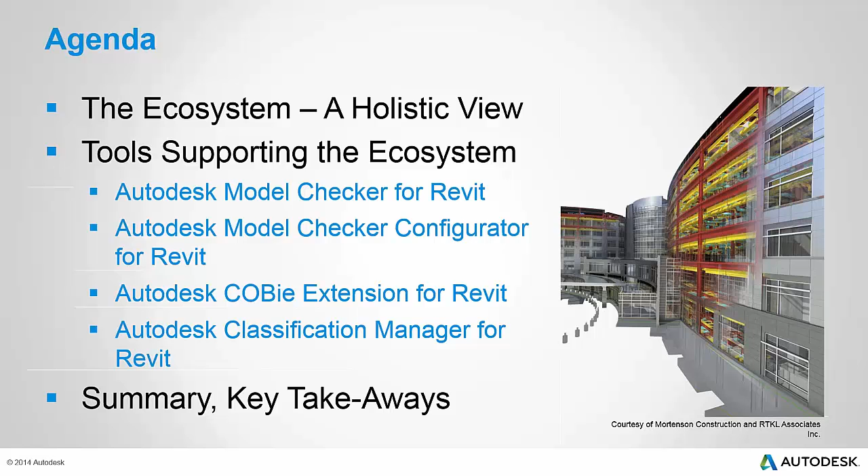So let's think about this idea of an ecosystem and why this is important to you. James Moore said it in his book, The Death of Competition, that a business ecosystem is an economic community supported by a foundation of interacting organizations and individuals. So think about every project you do as a large university owner, or if you're an architect or engineer on this call working with large university owners, you understand that everybody works as part of an ecosystem. So it's only in embracing this whole ecosystem that we can start to really understand who these individual stakeholders are.

Do they all work well? Well, not necessarily, and the reason why is because many times these ecosystem members are siloed. They operate independently. We also have traditional processes in place that typically address one stakeholder or team - for instance, maybe the process of the design team or the construction team, etc. And then we compound all of this by using contract models such as design-bid-build, CM at risk, etc., that contractually separate stakeholders. All of these start to magnify the challenges.

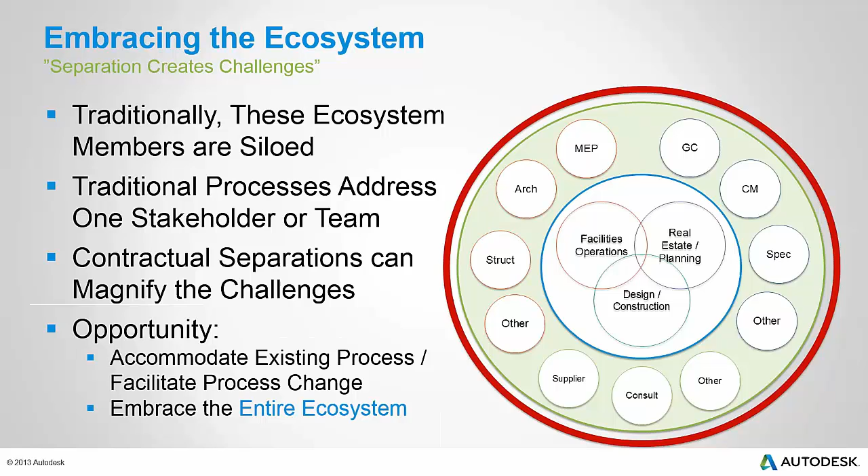In the case of our team, we tend to look at this as an opportunity - the opportunity to accommodate all of these existing process and facility issues and facilitate a process change by embracing the entire ecosystem. How are we doing that? We're embracing the ecosystem by understanding that the core of this ecosystem, you the owners in the center, need different tools. These tools need to not only support your workflows, but they may not necessarily be the tools the other members need. Ideally, these tools should do a few things.

They should give you the ability to facilitate insight into the models and the data contained within them. They should be tools to validate, to assist that ecosystem in understanding and meeting the deliverable requirements you have of them, and then they should be able to assist in the delivery of information downstream. If we can create tools that support this concept of analyze, validate, and deliver, we can ultimately facilitate and enable your existing workflows.

That is how we as Autodesk are looking at all of this.

How we are dealing with this is by working with one of our partners, CAD Microsystems, and CAD Microsystems is doing development work for us. So as we look forward in the agenda, what I'd now like to do is turn it over to Jason Kunkel, who's going to walk you through some of the specific tools that we've been developing with CAD Microsystems to embrace this ecosystem. So Jason, I'll turn it over to you.

Thanks Chuck. Hi everybody, as Chuck said, my name is Jason Kunkel. I'm a Senior Application Specialist over here at CAD Microsystems. We are really excited to be sharing these tools with you all today. We wanted to go over some of the highlights of each, cover some of the pain points that we've been seeing, that you might have been seeing, and then how these utilities can help alleviate some of those issues that you're coming across.

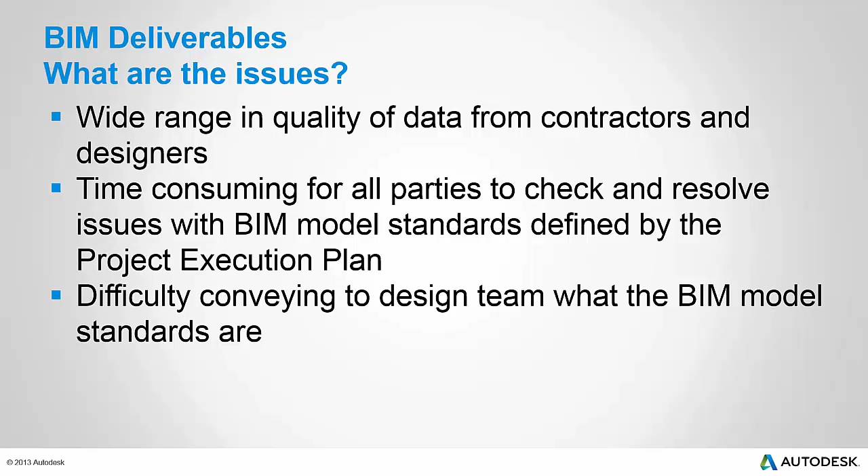Thirdly, it's kind of tricky sometimes to convey the intent to the design team of what the model standards are. Frankly, the project execution plans can be long, and they are not necessarily the most exciting documents to read. They're absolutely critical, and they are a great way to organize and document those requirements, but for a Revit modeler sitting at his or her desk, those individuals can potentially have a hard time referencing that document over and over and trying to figure out the standards and how they may apply to what they're doing right there at the time.

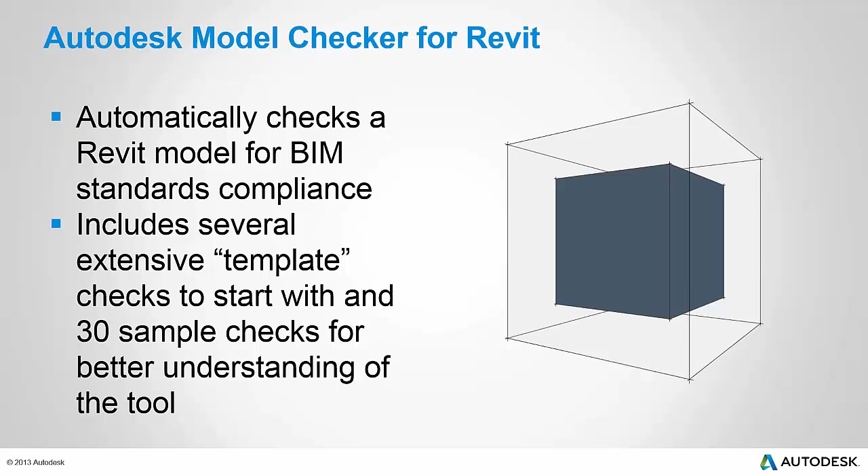So what we have with the Autodesk Model Checker for Revit, its primary goal is to accurately and automatically review a Revit model for the BIM standards and then to report a pass or fail on those model checks. We have included several very extensive checks that you can grab with the tool, and there are also 30 individual smaller checks that are much easier to review and to pick apart and to understand what the potential of the overall tool is.

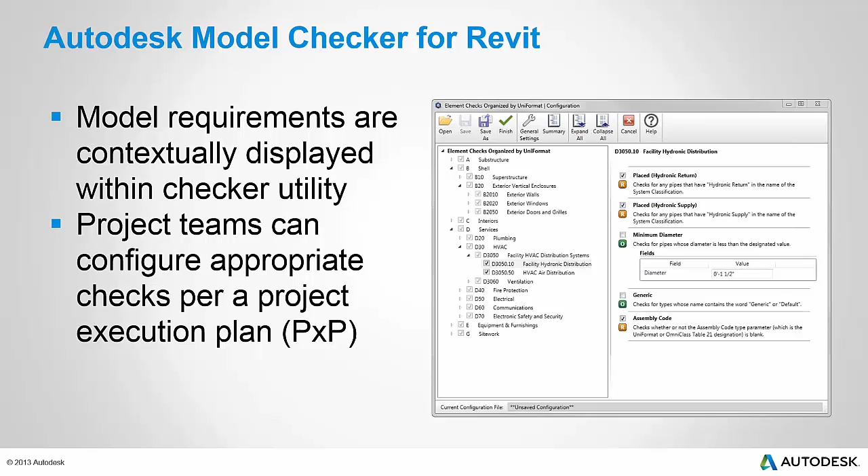The checks can be flexible. We can mark some as required and some as optional—you'll see the O's and the R's there. That allows the person doing the checks, or the person doing the modeling, to go and actually adjust the check at the time based on what the requirements are for that specific phase, or if a model itself needs different requirements based on its size or its needs.

Because the tool is automated, the design teams can run the check whenever they want. You can even make a periodic check part of your execution plan, with the reports reviewed at points in the design and construction process that make sense for your team and for the project.

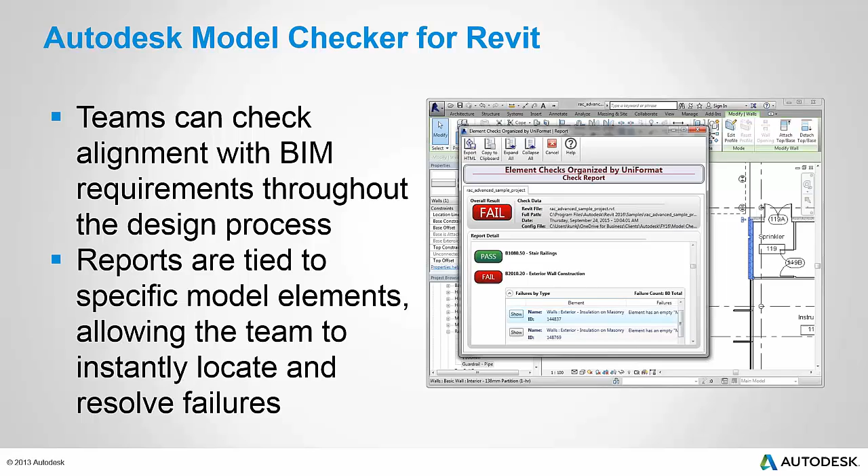With the model checker, you have the ability to run a check on more than one model at a time. You open up the check, tell the model checker which models to look at, and click the Go button. The size of the model and complexity of the checks will make the length of time per check vary, but it will be infinitely faster than having a human open up each Revit file one at a time, open a checklist, and go through a list of things to verify.

Once the check is done, the reports can be exported as an HTML file that you can easily send to anyone. It includes all the information within the HTML file that you're going to find in that same report within the Revit file itself.

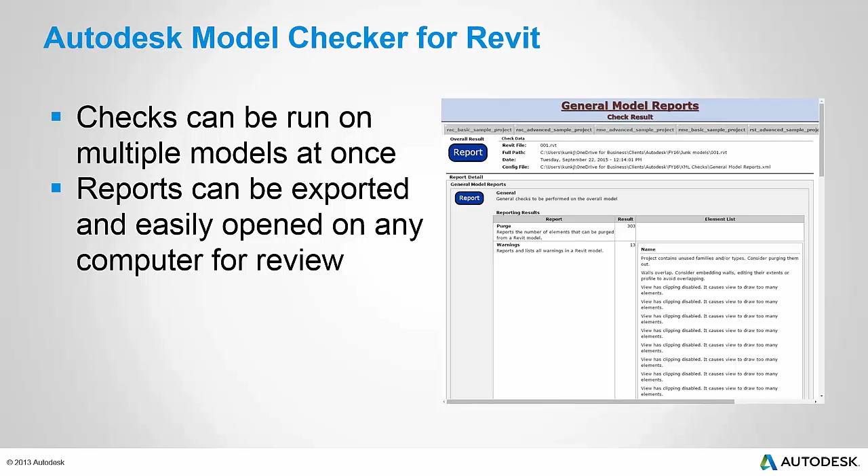So the checks can be as complicated or as simple as you need them to be. The model checker is an amazingly powerful tool that really speeds up and simplifies the BIM model checking process, and it also makes it far more consistent and reliable.

Going hand in hand with the model checker, we have the model checker configurator. This is not a Revit add-in like the model checker itself, but it outputs and generates files that are used exclusively by the model checker.

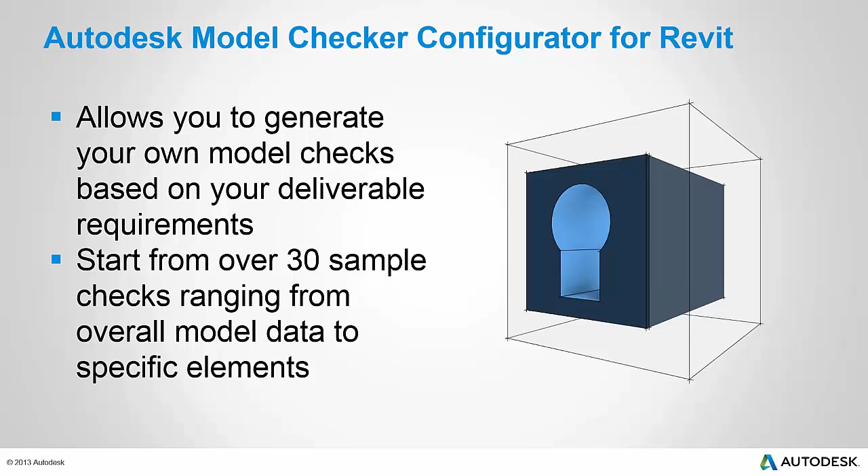The purpose of the checker configurator is to generate your own model checks based on your own deliverable requirements. Much like the model checker itself, it can use those same sample checks, and you can build on those, dissect them, tweak them until they fit your own purposes.

Again, the checks can be as simple or as complicated as you need them to be. The collection of checks you use can have one check or it can have 100. It all depends on the requirements you need.

Based on some excellent feedback we've gotten over this being in beta, we are currently working on a wizard interface to try to simplify the process of creating checks.

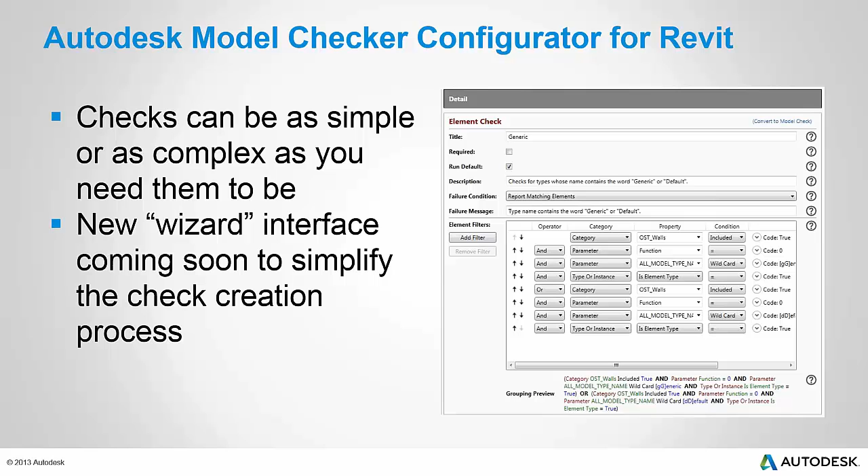If you look over that screenshot, checks can be a little tricky. They can be far simpler than that, but I wanted to give an example of one that might be a little difficult to parse through if you aren't a nerd or even a partial nerd.

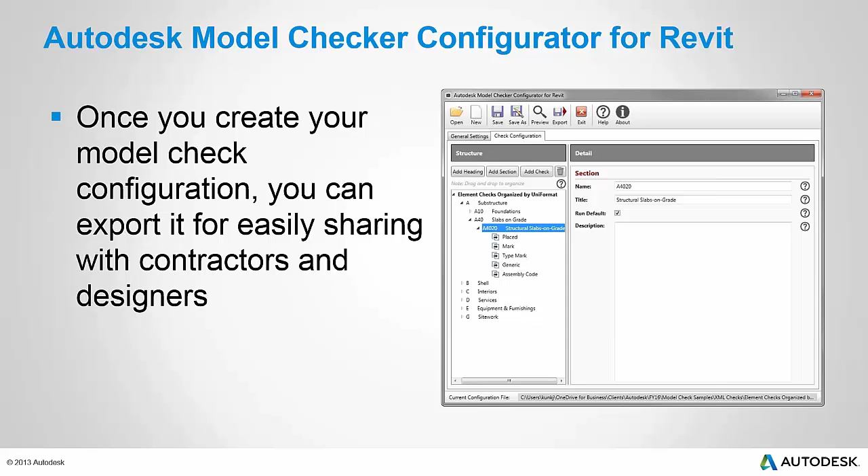The beauty of the model checker configurator is that once you have created your checks, you can export the collection, collect those together, and send them out to the entire design team, allowing them to use the checks you've generated at any point during the design or construction process.

The third tool we have here is the Autodesk COBie extension for Revit. And just as a baseline, I wanted to do a quick refresher on COBie itself.

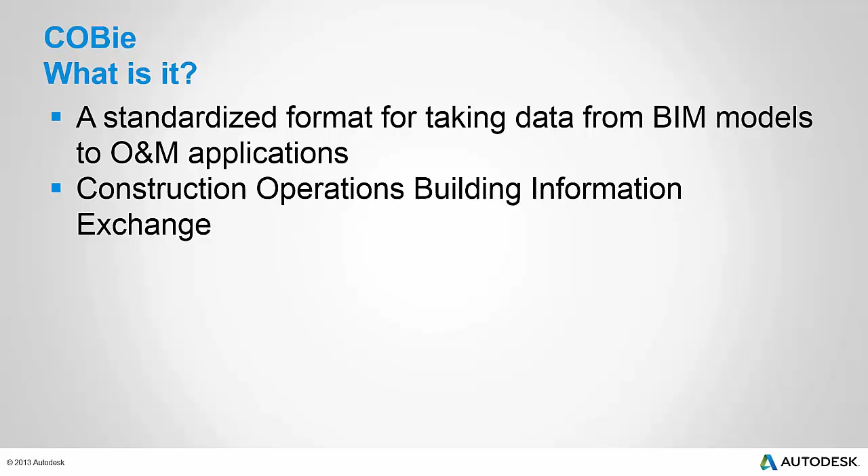The software it sends to does not typically open a Revit file natively, nor does it necessarily want all of that Revit information. So COBie is intended as a common set of language rules that allows these unrelated pieces of software to share data between them.

As COBie has become the norm for data exchange in the industry, we've seen some issues pop up. COBie is an extremely strict set of rules, which is fantastic because it allows all of these different tools to be able to talk to each other, but it also makes it difficult to make sure your data is COBie compliant, especially if that data is being coded manually.

People who consume the COBie data are typically not Revit users, and on the flip side, the modelers using Revit are usually not very familiar with COBie, and so even though it's great for sharing data back and forth, you may not have a baseline for those users to communicate, which can lead to problems and definitely confusing results. So the COBie extension has been designed to alleviate a lot of those problems that we've discovered.

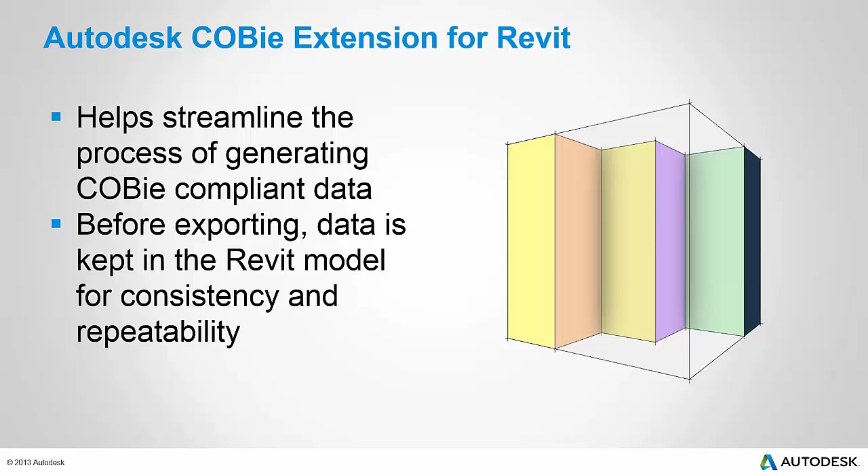So as it's being generated, the data lives right inside of the Revit model. It maintains it for consistency and repeatability, and so those Revit users who may not be too familiar with COBie can hop right in there, work inside of Revit, open up the add-in interface that they may be familiar with, and it helps get that information populated in a more consistent and easier manner. So the parameter fields are right there in Revit, like I said.

COBie requires rooms or spaces to be attached to zones, and Revit does not have anything comparable to a zone. It has rooms and it has spaces, but it wouldn't know what to do with the zone in there. So the COBie extension has been built with the Zone Manager to allow the Revit user to assign rooms to zones. Those zones are then stored within the Revit model so the user can go back and reassign or readjust later.

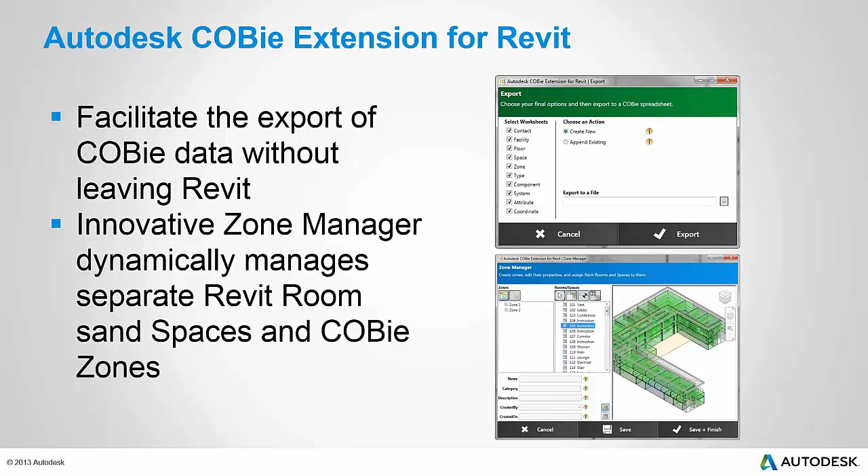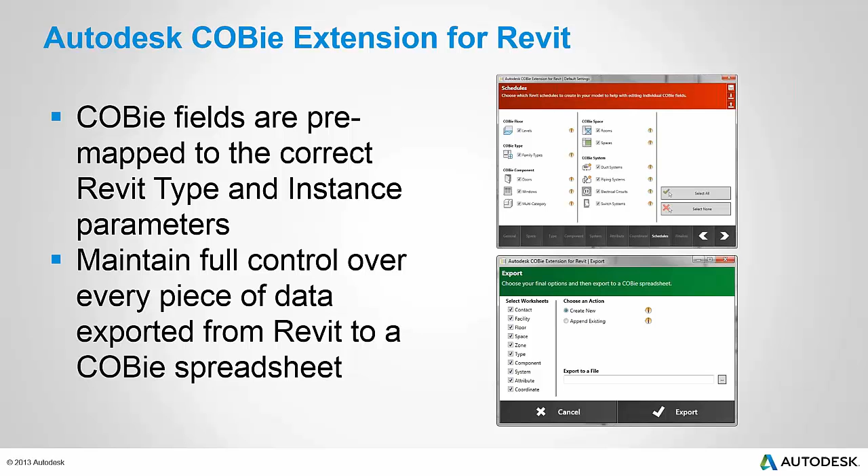Following along with that, the COBie fields are mapped to the appropriate Revit parameters, and it helps speed up the data population. And when the COBie data is exported to the spreadsheet, you can pick and choose what information you have in your model that you want put in that spreadsheet and what you just want to skip at that time.

Much like the Model Checker configurator, we are working hard on version 2.0 of the COBie extension. One of the major requests and additions is a manual parameter mapping utility in case your Revit standards already accommodate COBie data, and so we're not forcing the COBie extension parameters. The setup of the tool has been reorganized to more closely match the COBie worksheet output, and on top of that there is more flexibility in naming the exported COBie components to make them easier to understand or follow other requirements and standards that you might have.

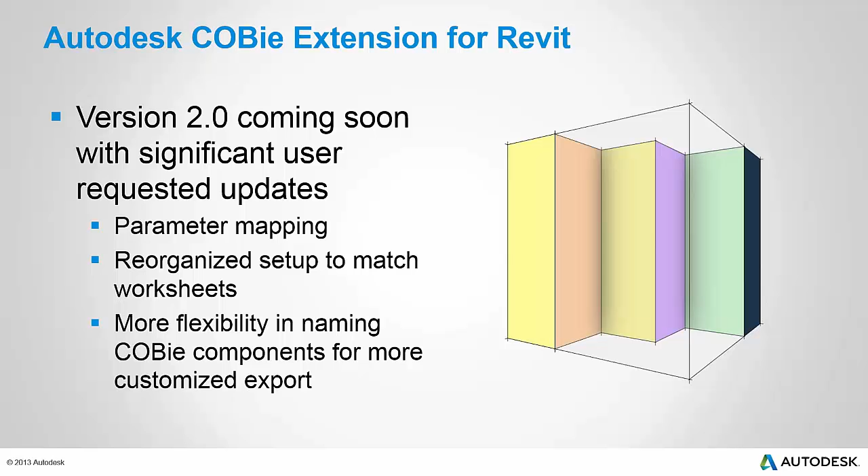And I might as well mention now, these 2.0 versions that we're working on aren't something that we're expecting to happen years and years from now in 2017. These are items that are being worked on right now, and we've got a lot of progress on them, and we're really excited to get them rolled out.

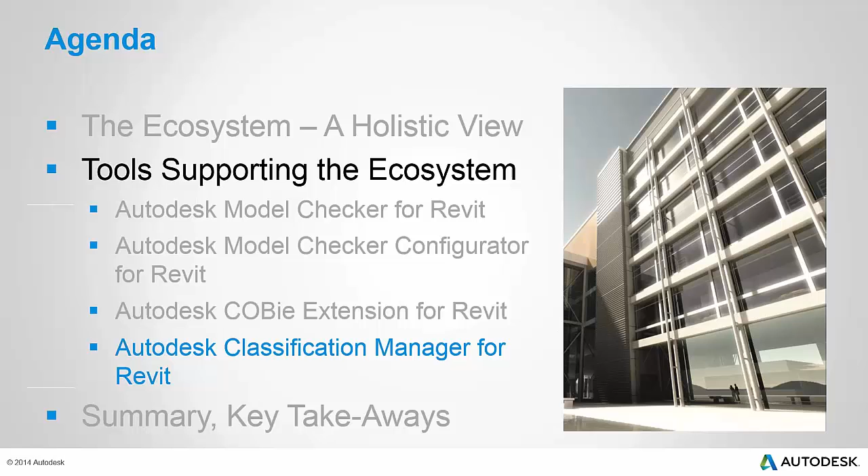The final tool we have is the Autodesk Classification Manager for Revit. So it seems like over the last 10 years there has been an explosion of different classification standards in the industry. I think the issue really is more that we are sharing data back and forth as opposed to sharing drawings back and forth, and so there needs to be a better way to help organize and categorize that data.

There are several different prominent standards that have come across, each with its own purpose and time frame that need to be implemented. If you've looked at any of the standards, they are vast. So I cannot even begin to imagine memorizing even a single one of these. And then trying to establish a relationship between the individual categories can be even trickier. To top it off, depending on your BIM standards, it's important to make sure elements have the right classifications assigned to them in a timely fashion.

So the utility we have is the Classification Manager, and its primary purpose is to quickly add classification information to Revit elements from OmniClass, Uniformat, MasterFormat, and Uniclass, which is coming very, very soon.

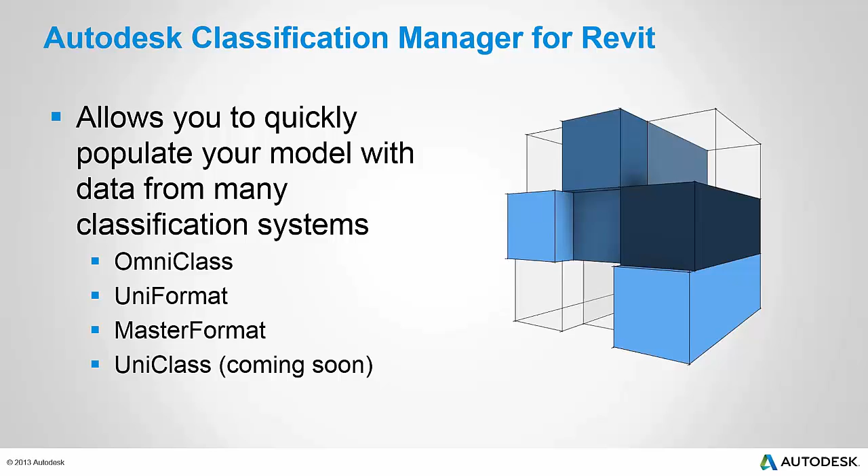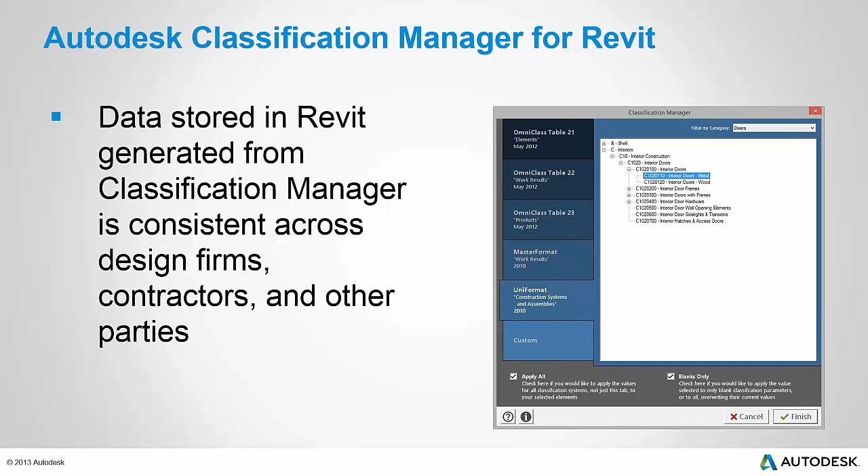So finally, the data is stored within the Revit model, which makes it accessible throughout the design and construction process. Plus the data is consistent. The parameters are consistent, the information for the database is consistent, so everyone using the Classification Manager has access to the same parameters and same database to populate their data. So like I said, those are the 4 utilities we've been working on. We're very, very excited to get them out there in the public, and that kind of wraps up what I got. So right now, Chuck, I'm going to turn it back over to you.

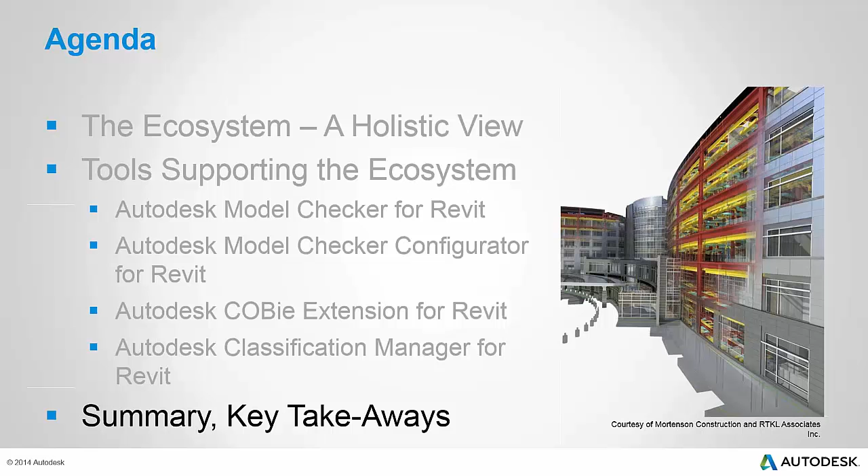First of all, we're really looking at the entire ecosystem around the owner to try to understand what are the opportunities for us to assist in that process, to help create a tighter opportunity for the entire ecosystem to work together and to drive more value for you. In order to do that, we're looking at developing some specific point solutions where process challenges can be identified. And there's one thing I want to emphasize in all of this. There's no cost to any of the tools that we've talked to you about today.

There are typically two components to them. There is a shell that installs within the applications. Typically, we will support several versions of Revit. For instance, the Model Checker will support 13, 14, 15, and 16. And then there is the configuration. And the configuration is what you will either use the tool and save, or in the case of the Model Checker, use the configurator and develop the standard and save. And then in order for the entire ecosystem to be in sync, you basically need to point them to some place to download the tools, the shells, and then provide them with your configuration as an owner.